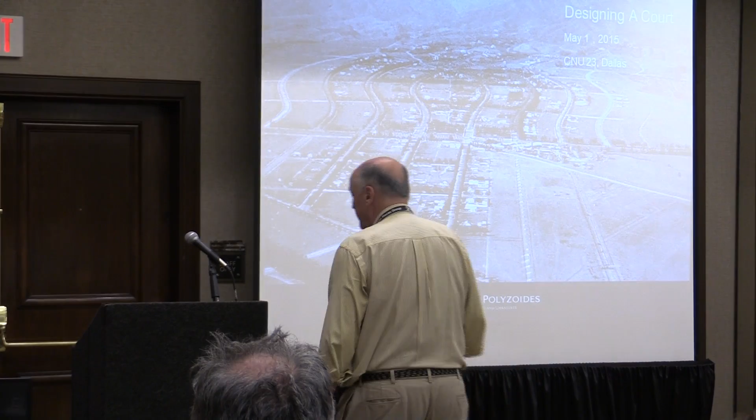One of the fundamental accomplishments of the New Urbanism is that it actually ended up turning the world of buildings and space upside down, because since the preeminence of CIAM urbanism and architecture took over the world in the 50s, 60s, buildings ended up floating in space, and space became a medium which was essentially residual. And that dissolved urbanism really as an identifiable placemaker, form giver, image maker in the world.

And it was the CNU who insisted that by reversing this figure-ground relationship, the void became really the most important aspect of both architecture and urbanism, in a sense returning to urbanism, having the void reconstitute this discipline and make it become prominent again after probably three generations in exile.

And the issue, as you will see in my first slides, can you turn some lights off? Yeah, actually, it's controlling lights. Are they back there? They're in the back again. Perhaps I can flip them up. If you can bring them down just a notch. I'm going to try to maybe stand someplace where I can see. Maybe in this corner. Am I blocking anybody? Probably not. How's that? Good. That's good.

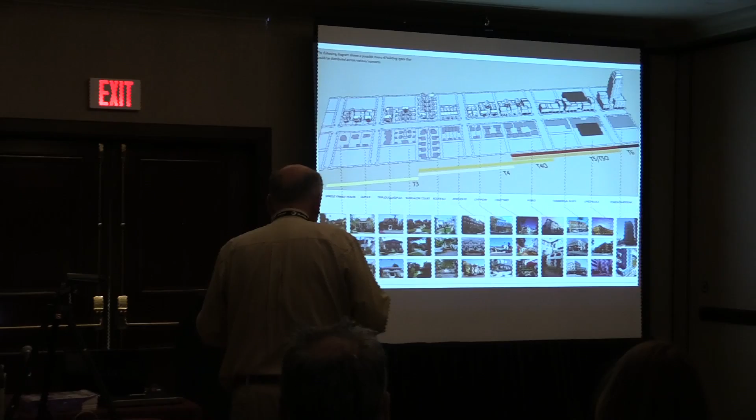So when we talk about courtyard housing, courts in effect, what we're talking about is a type that is operating within a spectrum of typology of intensity. It translates from single-family houses probably to towers along this drawing that you see at the top.

It is really characterized, organized by its emphasis on open space and public space, inside it and beyond it and around it, and it's operating at the very best in the robust T4 territory. This is very important for you to understand, because we're not talking about every kind of building of this kind and every kind of circumstance.

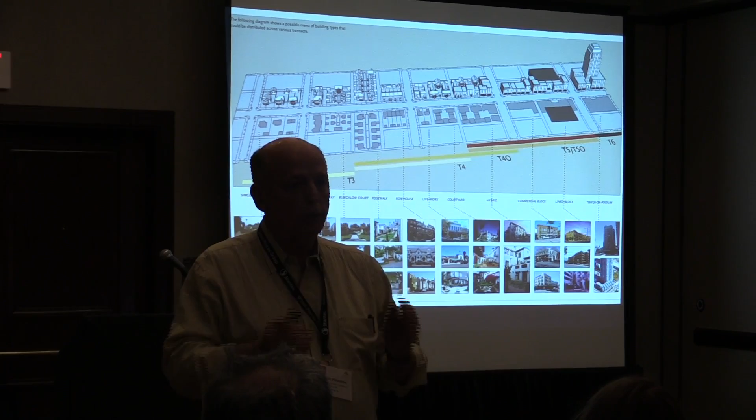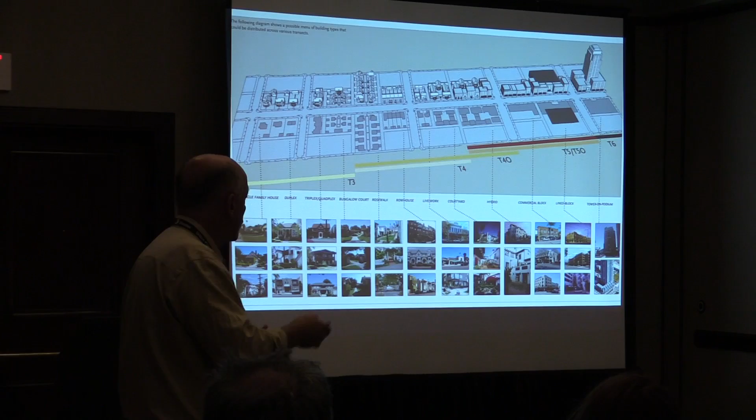We're talking about a particular slice, because there are various kinds of courtyard housing that are operating within T4, T5, which are denser hybrid, and which involve complications that I'm currently writing about in a book that I can't even get into. But the fact is that you need to think about this as being space-driven and operating within the middle range of housing, which is the rarest ones, and the missing ones referred to in this Congress.

And this is a typical fabric. This is sort of the habitat of this type. You have to think about this as sort of photographing gazelles in Africa. This is courtyard housing in Los Angeles, in a project in the city of Orange, in Orange County, I should say, and you can see that it is both operating within this transect intensity, but it is also beautifully compatible with other buildings within this intensity, because its built pieces and its voids

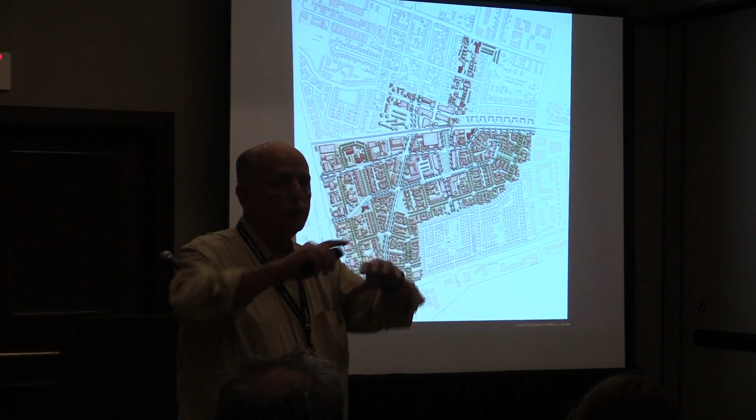are house compatible. And this is where the genius of T4 American town making is, that building types across a pretty serious range are all talking to each other and together form the city well. And this is an example of that. This is Seven Fountains, the first project we did of this kind 11 years ago, and it's sitting right there in the midst of buildings, some of them old, some of them new, spanning probably 100 years. And nonetheless, you can see how this building habitat allows that type to flourish.

And this is a 5-minute review of the book Courtyard Housing in Los Angeles, illustrated by recent buildings of ours, which we tried to build every one of. We're not totally successful. 12 dwellings per acre, bungalow court. Bungalow court, basically taking individual units, separating them, organizing them around shared space, parking in the back. Attached court, these buildings actually are connected side to side, shoulder to shoulder, parking underneath, behind it, on the sides.

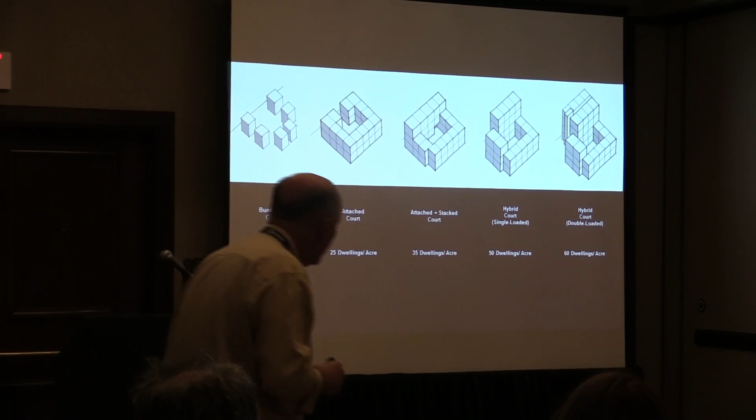We're talking about T4, and of course the two to the right are probably at the very edge of T4, but nonetheless, we have bungalow court at 12, attached court at 25, attached and stacked at 35, hybrid court at 50, and hybrid court double loaded at 60. And these involve 2 cars per unit. So these are remarkable density numbers, much higher actually with one car per unit. One could get a lot more density.

It's an amazing way to think that you have house compatible types that are operating at 40 DU per acre. I mean, it's just completely incredible, because 25 years ago, you would go into a city council meeting in some town in America, and they would hang you if you said you wanted to build 40 DUs per acre next to a house.

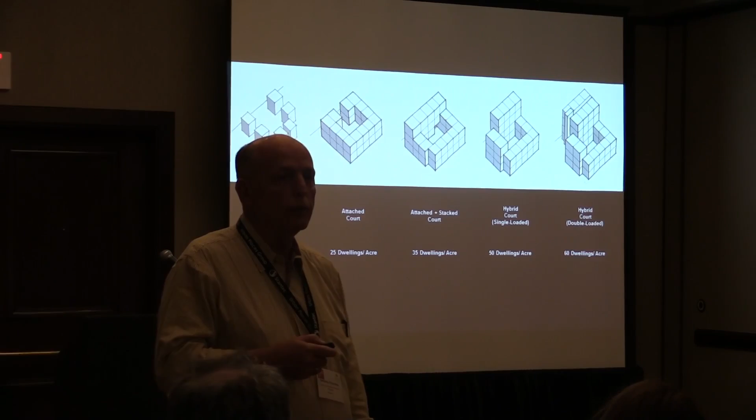And the other miraculous thing about this type, and this range of typology in the missing section of the transect, is that you can also walk, because all of these things are walk-ups, and I'll talk about this in a moment. You can actually have lofts of an unusual height, California lofts or industrial lofts, townhouses over flat lofts, townhouses over townhouses, flats over townhouses, and any combination of these types, so that you can derive the most extraordinary richness possible out of the dwelling environment in which we live.

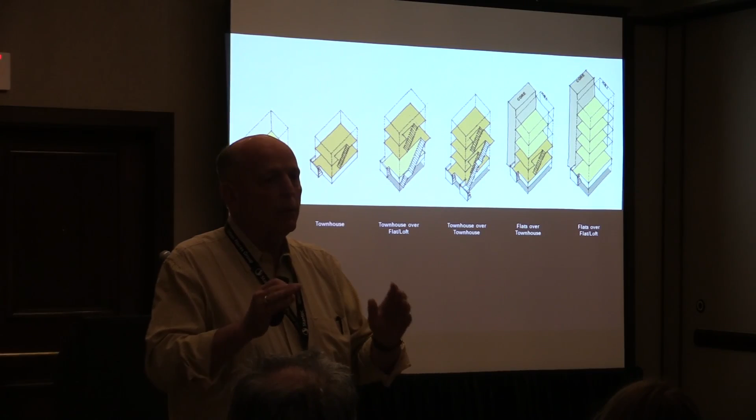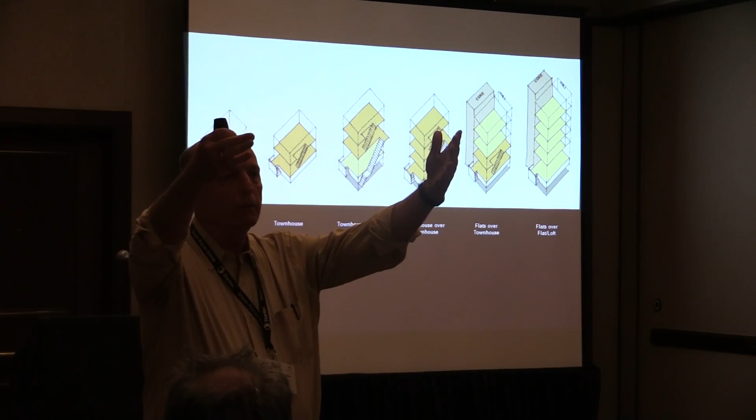And because this is a very foreshortened and painful introduction to the subject, this was so superficial, nonetheless, I want to remind you that the very essence of courtyard housing is that there are no elevators, lobbies, or corridors in this project. Basically, you enter the realm of a lot with a building on it. You either enter the units directly or up a stair into units. So you get flat over flat, flat over townhouse, or flat and townhouse.

I mean, that's exactly about it. I guess you can get townhouse over townhouse. These are the combinations you can have. Always direct access, always no common space. So you save about 15% of construction cost, and you have to spend it in the garden.

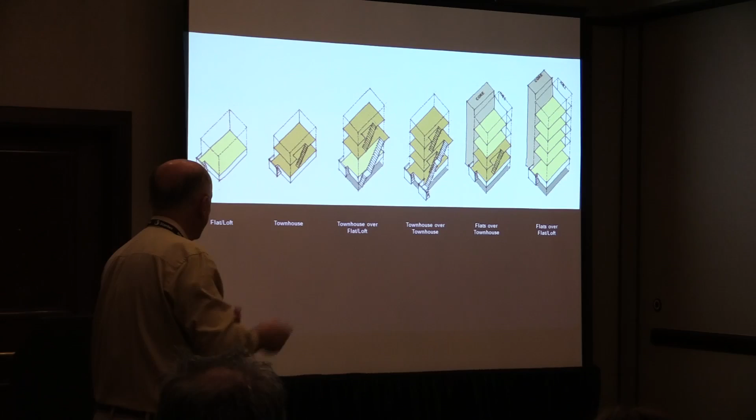And these are the types that we've managed to build in the last years. We built about 30 of these projects. Actually, we've designed about 30 and built about half of them in a very kind of hard-fought, quiet, but kind of resolute way of going about it.

This is our #1 project we did in our office in 1980. Pasadena Heritage asked us to move this court across town, and we picked up all these buildings and moved them about 3 miles and set them back on a new site and built a peripheral road and garages and backyards for them. The site they came from was about this big.

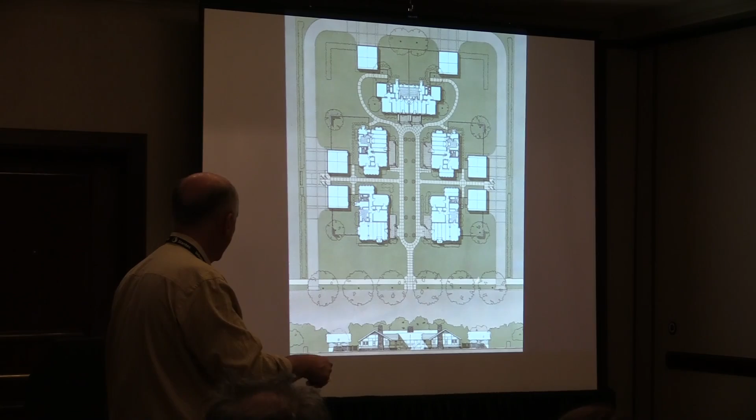So this is a wonderful example of rejuvenating and rebuilding a historic court and learning a lot about what that meant. It's particularly important that you can build a building like that in a residential neighborhood with single-family houses, either 3, 4, 5 units per acre, and all of a sudden you get 4 times the density here, and the thing is miraculously consistent with the world and respectful of the world around it.

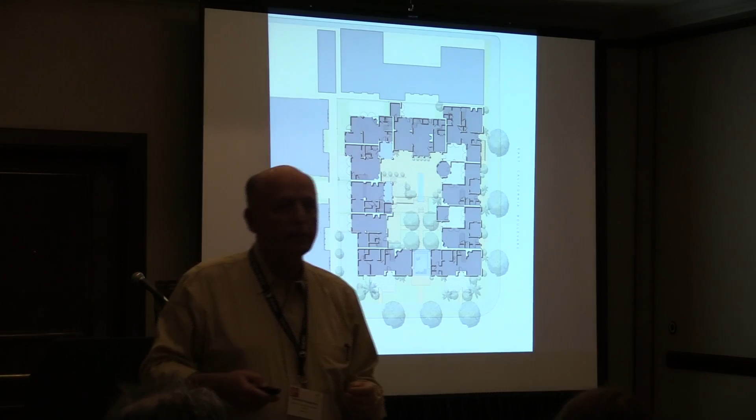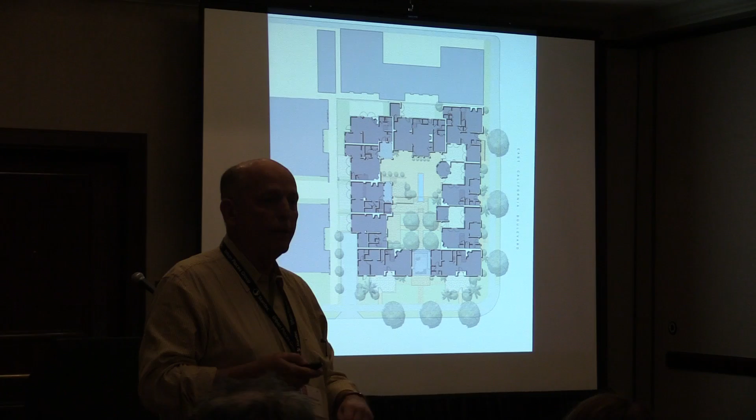And then, the book was written in '77. We begged on our knees for at least 10 to 12 years for somebody to actually build one of those for us. And in the end, nobody would. So we bought that lot behind our office and built the first one since about 1937. And actually, we made about $53,000, which was really, at that point in our lives, an amazing amount of money. So basically, what we learned from the book, we applied.

You can see paired units. First of all, when you're dealing with units that are fee simple, you don't have to repeat anything, and you don't have to stack anything. The repetition is only a matter of architectural interest. And so what we in fact did is we paired these, we made this the same, and we put live-work units here, so you could enter both from the side and from the street.

It's a corner arrangement. There's a special unit in the corner with a live-work unit there, special unit here, special unit here, special unit here, special unit here. The result is that there are 10 units, of which about 6 are different and 4 approximately the same.

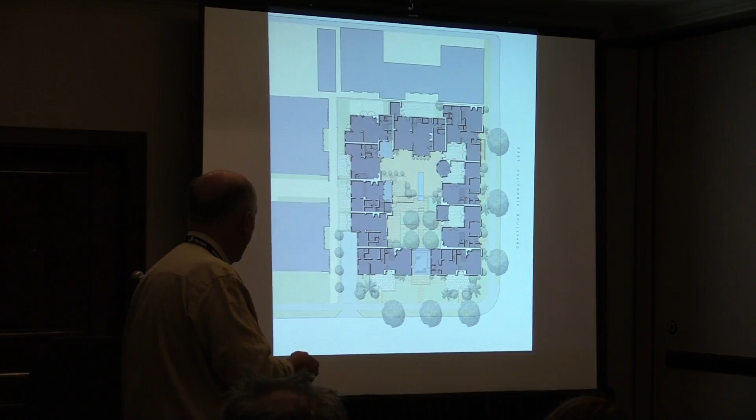And this building began the extraordinary inflation of per square foot prices for condominiums in Pasadena. When we started this process 11 years ago, condos were selling in the $350 to $400 territory at the upper edge, and they're currently selling in the $650 to $750 because of this work. Not this one in particular, but in this kind of vector.

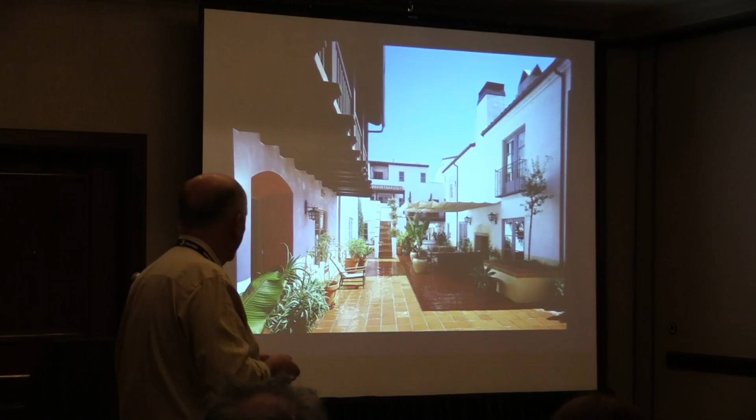This is a soft garden, and then this is a garden that shows both the hard-soft differentiation, but also shows the house compatibility. It's about 35 DUs per acre because there is a work room within each unit by West Hollywood zoning. So there are 20 units and 20 rooms.

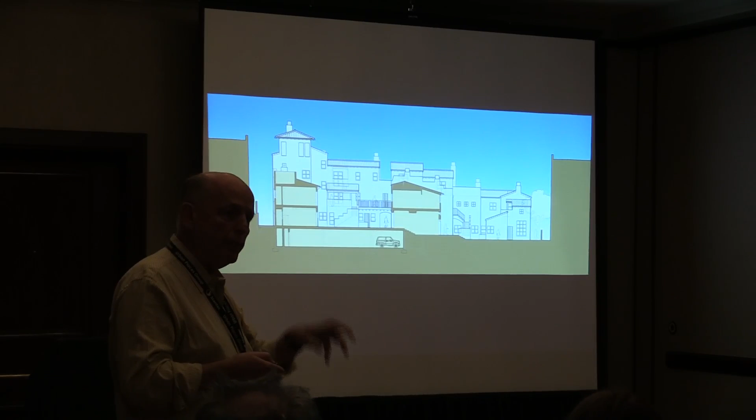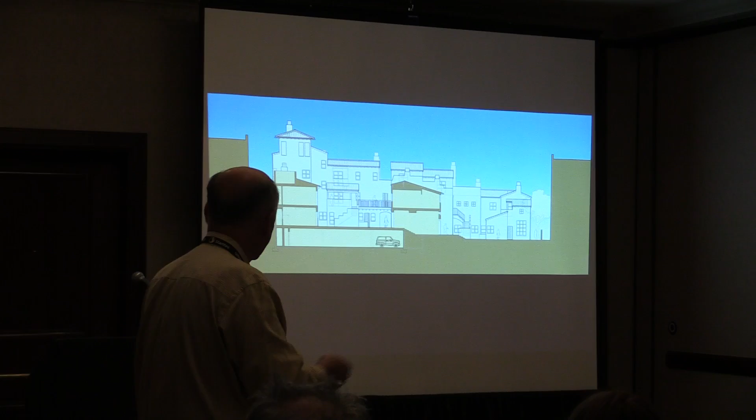You can have a business in your own house with a separate entrance, which gave us an enormous opportunity to do crazy things like build all the stairs going up from everywhere to everywhere, just to differentiate the workroom from the regular room. So this was an unusual learning opportunity, and then this is an example of the much closer to 50 DUs per acre, which is double loaded here.

You can see the elevator there, I'm sorry, there in the lobby. And you come up, you have to connect from here to here, that's it, and all of this is stacked 4 stories. Townhouse below, 2 flats above. And these are 2 and 3 stories everywhere. 2 stories here to allow the southern sun to enter. 2 and 3, all walk up. Stairs here, stairs there, stairs here, and so on.

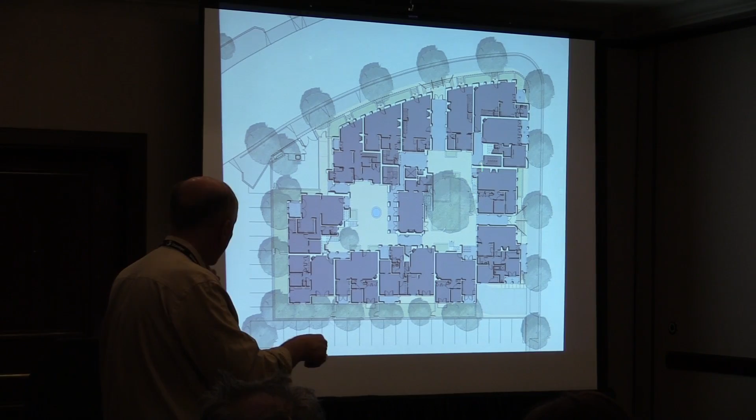And this is what the building looks like on the outside. And this is what the interior is. The first courtyard with the townhouses and the corridor. It's a loggia and a balcony on the second level. And this one is the second courtyard. This is selling in the $650 square foot territory. It's a very, very popular place. It's impossible to buy in there because people move and buy and stay.

And this is from the point of view of urbanism an important thing to see, because what this architecture, compatible with a single house, does is it can be played down within a block to extraordinary degrees and advantages in moderating the densest forms of this courtyard housing with smaller forms.

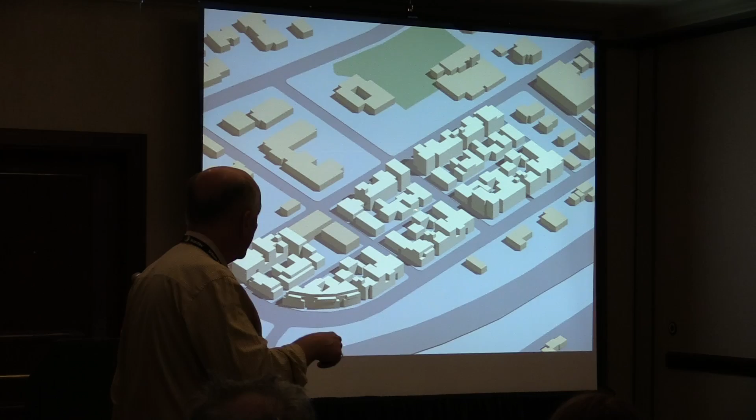For instance, this is a competition drawing, and you can see in a single block there are 2 boulevards on either side. There is a piece here in the edge which is double loaded, purely double loaded, and becomes courtyard housing single loaded behind. And in the alley parts, which are the short parts, there are some very, very much smaller buildings, house scale buildings.

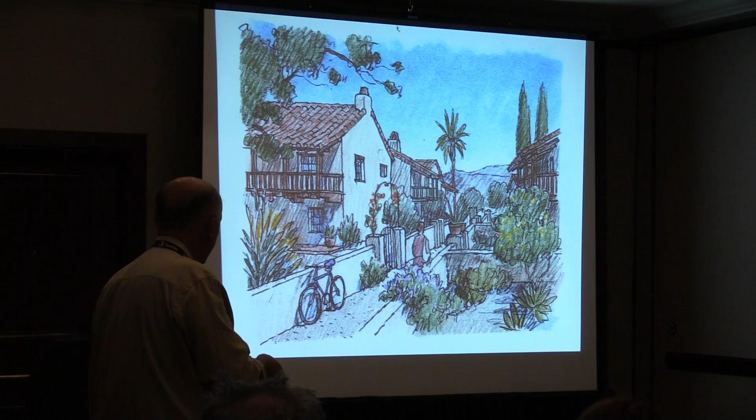So what you end up is a view like a version of this on the boulevard, which is robust, as you can see, with significant differentiations always on the fourth level. That's a very strong way of differentiating these buildings, cutting it back, eating the corner away, inset balcony, projecting balcony, retail at the bottom. And then the side street is a series of row houses, and the alley is a series of houses. So that within a single block is really a remarkable way of differentiating and compacting this kind of architecture within a walkable mixed-use urbanism.

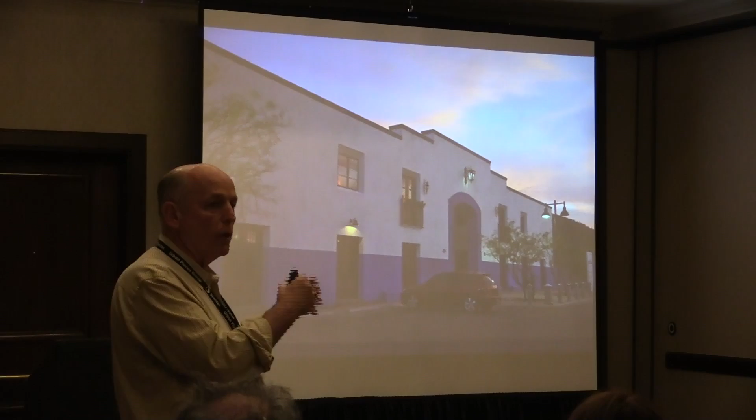And there are also some very unusual outlier examples. We're working on a project at Rio Nuevo, which was one of the projects we designed in Arizona, which is well worth visiting and under construction. There's some very interesting things going on there. And this was supposed to be a street that was going through to the edge of the site, and a developer builder decided to use the street, bought all the lots, about 6 lots on either side, and put a gate on one side and a gate on the other, which is open during the day and closed at night, and decided to take the street that was projected like this through this place.

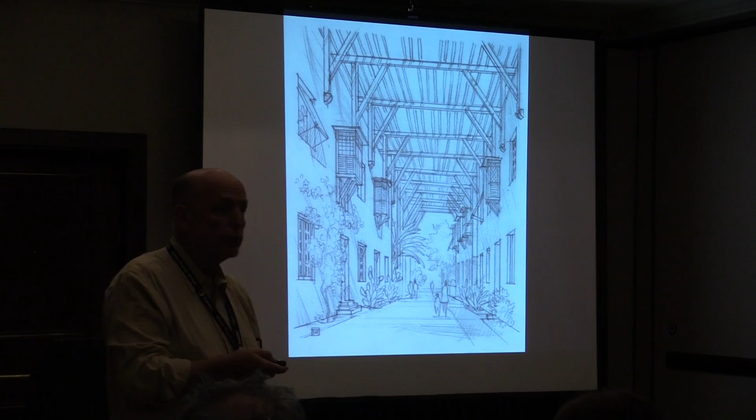And he's actually setting buildings back, sometimes very dramatically. And he's actually made courtyard housing out of it by sharing the public space and controlling it during the night and keeping it flexed, shared or public. It's really extraordinary. What is the name of that? Rio Nuevo is the name of the project in Arizona. It's in Tucson.

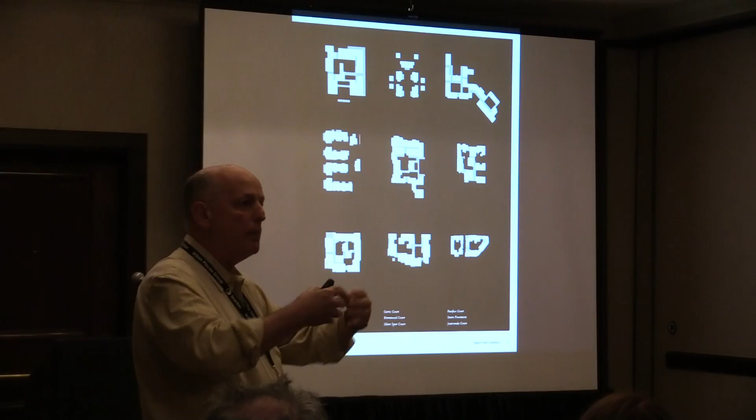All of these are really most amazing ways of showing how one simple idea about a kind of building can actually render truly miraculous results, all of which speak not to anything else, but the fact that this very flexible fabric can then make interesting city both at the solid level and at the void. So I thought it would be very, very useful for you to see how one makes.

First of all, we're going to have an exercise in which we're going to try to make a building like this in half an hour, whatever it takes, 20 minutes. But it'd be useful for you. I think there are two pieces of information I want to disclose to you before you do this. And I was very lucky because James showed me yesterday the presentation they had done on the making of a neighborhood. So I've decided to follow their lead and do it exactly the same way.

I'm going to show you, first of all, a project of ours. And we're very lucky because I have a project the way we showed it to a design review commission. So it's actually an intact presentation. So you can see how this thing is cast, as an idea. And the second part that I'm going to show you is what are the 10 principles that one can utilize to design this kind of work. And then we'll turn the lights off and start drawing.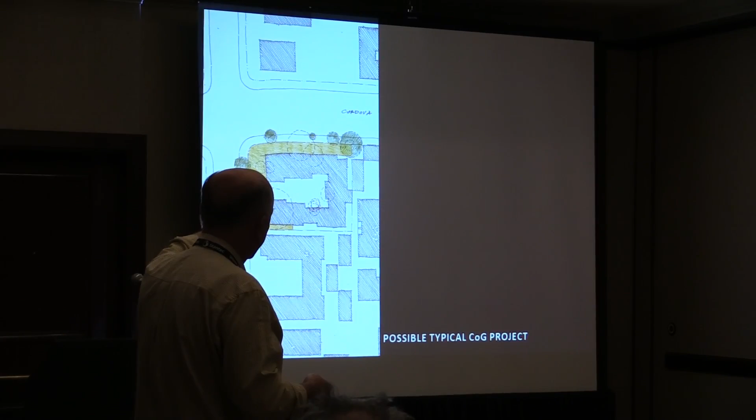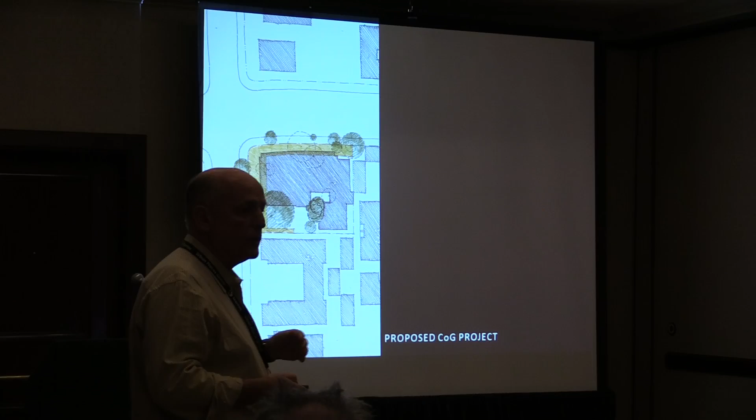And this is the possible typical City of Gardens project, which is a project that would be garden in the middle with two arms, because that's the normative type. But amazingly, Alexander, Wall and Solomon have no corner instructions for this type. Aha! So this is the project we attempted to make, and you'll see why we tried to do this. So we're pulling the garden to the side in part to save the building next to us, so we turn our face to it as opposed to our back.

And there are some other extraordinary opportunities that you will see also that come out of that thickness in the body of the building. So the second step, after choosing a type and working with it, is defining an architectural character in context by choice of massing, frontages, and both building and garden design ingredients appropriate to this place in the city.

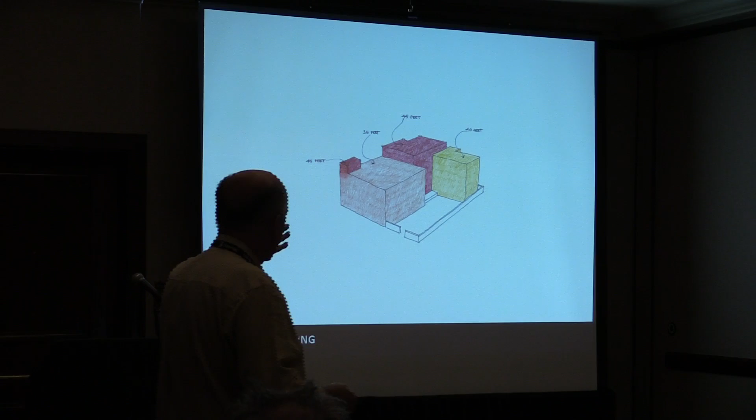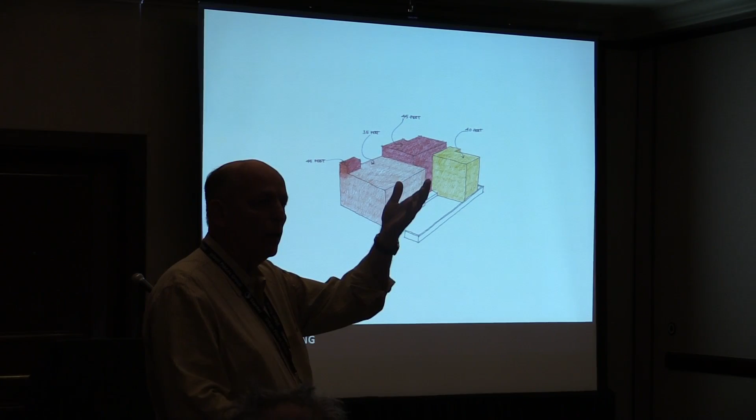We have a beautiful tool in the Pasadena zoning code, which is height averaging. So it is possible to take the maximum height and take half your building above it and half below it. So it allows us to actually break up massing. So we went from 40 average to 45 and 35 in 3 parts.

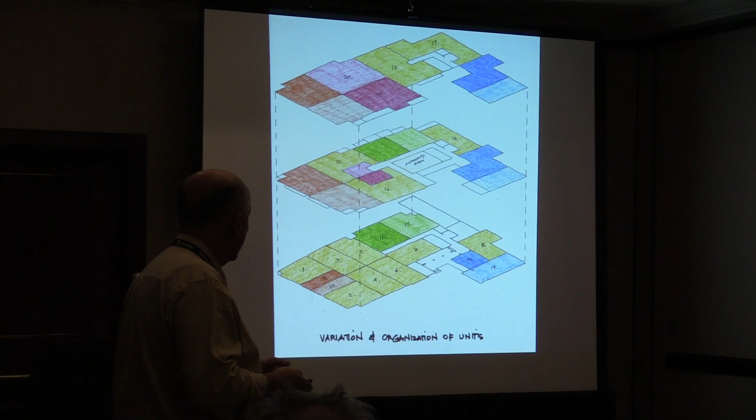And then we're able, within that structure, you're probably going to get, it looks like a Rubik's Cube, and it is. There are some flats, some townhouses, lots of overlap, extremely unique and unusual internal conditions of design of the units, which have to do with the fact that this client had half of the program be under 600 feet and half of the program be over 1,500.

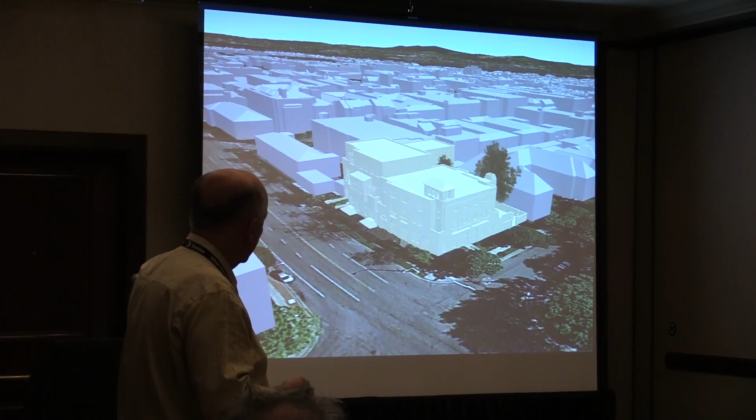And then we understand character to be the taking of all these things and building them together into a nascent image that is definitively of a kind, but does not have the architectural expression that comes out of a single hand. So this is the building in place. You can see on the left-hand side the stairs taking to townhouses. There's a projecting balcony there, a corner tower, the courtyard on the side, and that's the way in which the building sits in that corner.

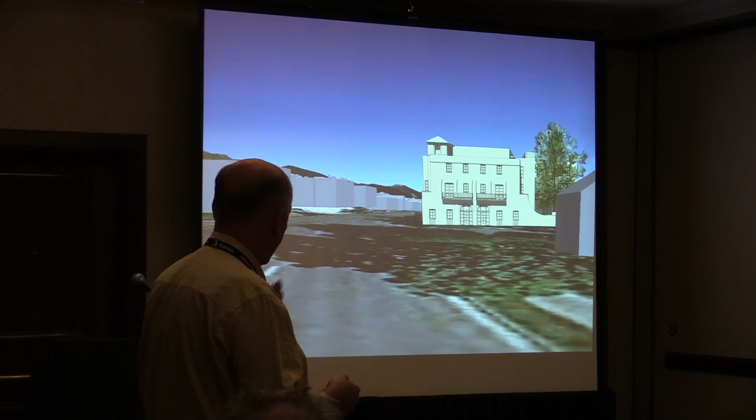And one of the reasons for making it symmetrical and central is that the boulevard, as you remember, just shifts around. So as you're coming through it, you're looking at this building dead on, and then you skirt around it. And the third step is that the architectural style proposed is integration of type and character issues into an expression that's unique and contemporary. It's something that comes out of the heart of whoever has the privilege to draw the final thing in all this detail.

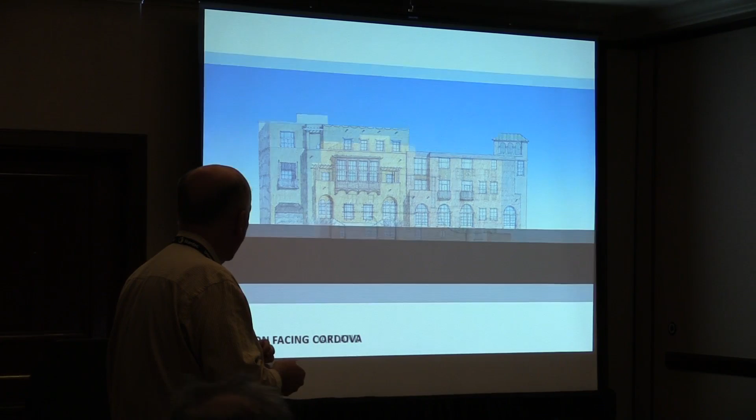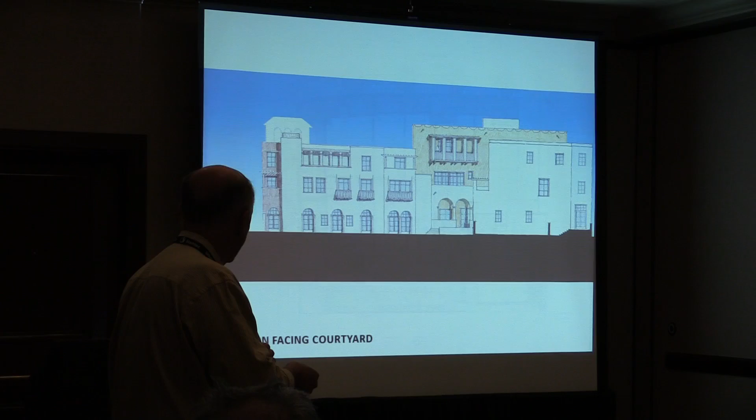And you can see how the building is now growing a face. It's growing an expression. It's growing materials. It's growing a texture along with a more precise proportioning and scaling of its elements. And here it is. Excuse me, we're going the wrong way. The outer face of the boulevard is actually broken down into various building scale elements. The symmetrical front is really a singular expression of the building as one approaches by car, and then the internal version is even more broken down into various pieces.

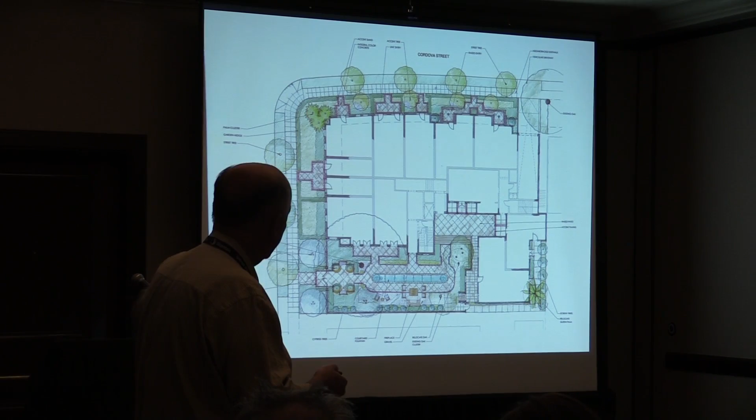And then a proposal about the garden. The garden is a very important part of the building. It is secured. It has water in it. It has a barbecue fireplace. It allows people to cross and come through. And there are all kinds of private garden entrances to the ground floor of the building. You can see sketches. This is all design commission stuff. You've been through it 1,000 times, I know.

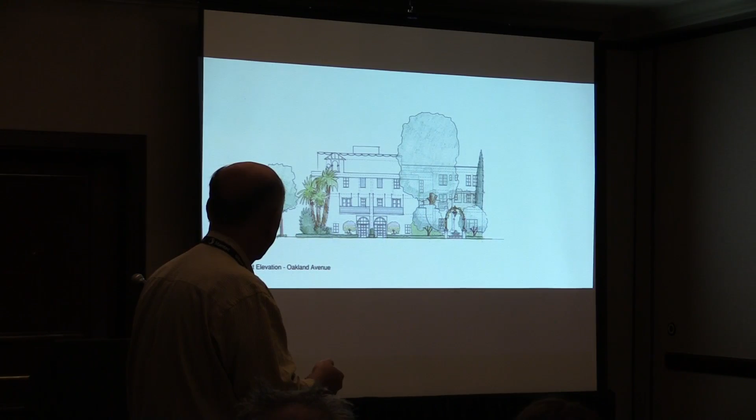And this is really the building, the way it emerges from this process. It is still not styled yet, although after this layer of consideration, it is actually getting damn close, right? And this is what it looks like with a commitment to a singular way of being built.

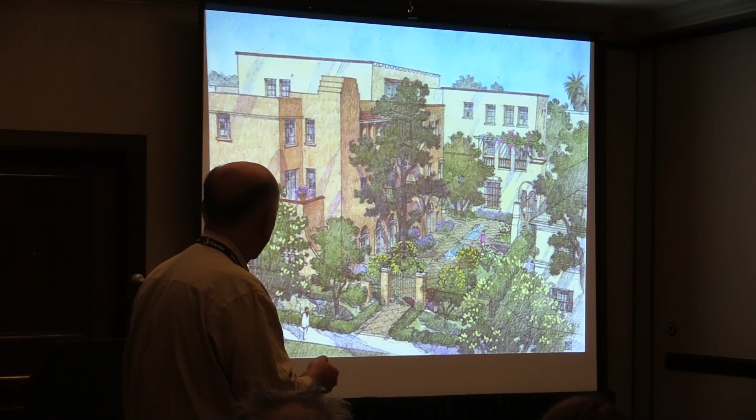We're going to look at these 10 issues, and I'm sorry I didn't have this illustrated. I sat last night in my room and after a couple of beers, just scribbled. Yes, Laura. Scribbled some serious explanations of what these things look like and why.

So I'm going to give you the 10 characteristics. They might be in a slightly different order because I didn't remember them very well.

All right. That's great. Should I do this one? Can you get closer? Yeah, you just kind of aim it in there. There, you want to see this? Just slide it down here and there you go. Include the camera. Actually, I think we should do it so we can read it, right? Facing it might be a good idea. Can we get any closer? See if I can bring it down by hand. Okay, so, not to waste time.

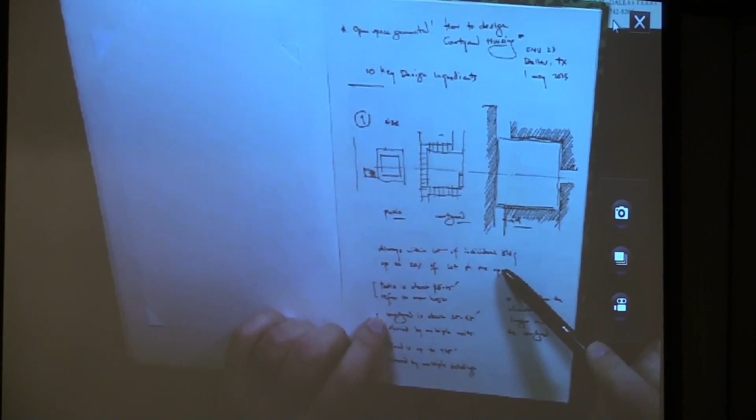Key ingredient, size. We have a patio, a courtyard, and a quad. And always within the lot of an individual building, 20% of the lot size has to be in open space. The smaller the lot, that is one space, but when the lot gets enlarged, it becomes a possibility of multiple spaces, including maybe quads, courtyards, and patios, depending on the circumstances, okay?

A patio is about 15 to 25 feet, and it refers typically to being controlled by one house. A courtyard is about 35 to 45 feet, and is shared by multiple units. And a quad is up to 125 feet, shared by multiple buildings. One house, multiple units, multiple buildings.

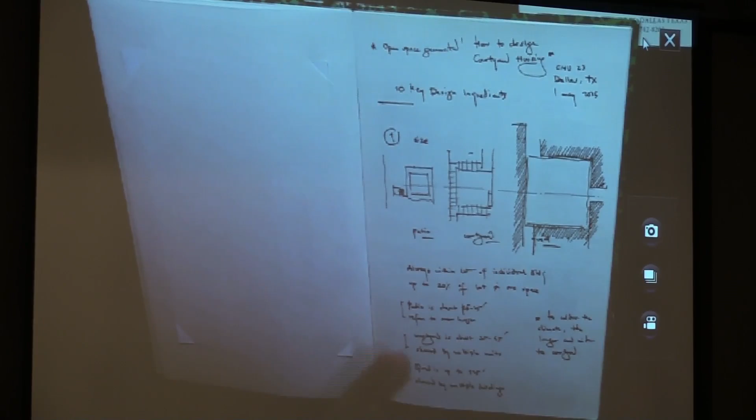And in colder climates, because somebody asked me about Toronto, the longer and the colder the climate, the larger and wider the courtyard. Because when you're in a hot climate, you really want to keep the sun out, and when we're in a cold climate, you want to pull the buildings out and allow, particularly in the winter, for the sun to melt the snow. So patio about 25 feet, courtyard housing 40, 45 feet, quad bigger.

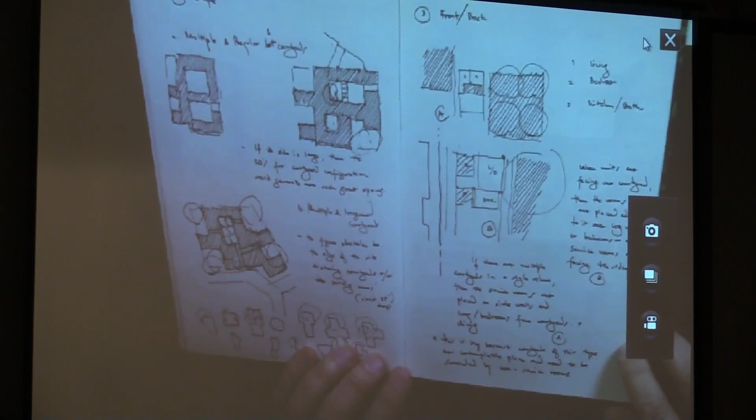The second issue, can we see it? It's a little bit difficult to see. Maybe you can bring it a bit further, can you move it sideways? Just in case? That's much better. There we go. Yeah, that's perfect. Go on, please. That's better. So, right. There we go. That's much better, isn't it? So I can just turn pages, huh?

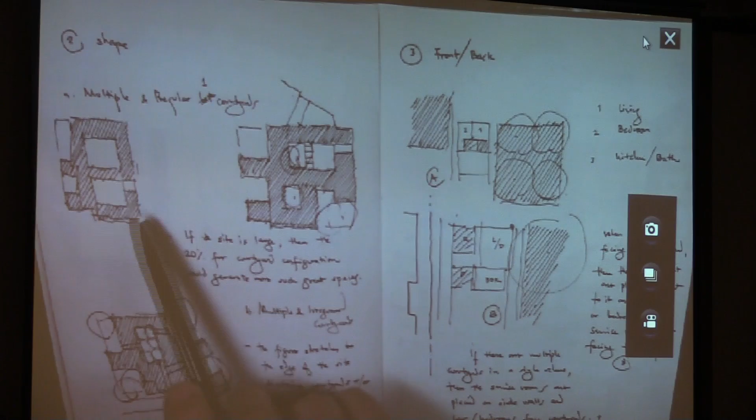Okay, on the left, shapes. You can see on the left multiple regular courtyards. If the site is large, then the 20% for courtyard configuration, we generate more such spaces. And then on the bottom, multiple irregular courtyards. The figure stretches to the edge of the site, distorting courtyards or distorting the buildings. The buildings are about 35 feet, take it from me for now. It could be 36 or 33, but 35 for today. And on the bottom right, any absurd array of courtyard shapes that warms your heart.

And then on the right hand side, front and back issues. Basically, if the courtyard is here, and a unit is here, and a courtyard is there, you can actually put living rooms, bedrooms on both of them, and kitchens, bathrooms in the middle. If you only have backyards here and another building here, and here you have just another courtyard, then you have to put bedrooms and living rooms that way. So facing the courtyards, you want as much regular room, living space as possible with services out of sight, side by side in buildings or on the service side.

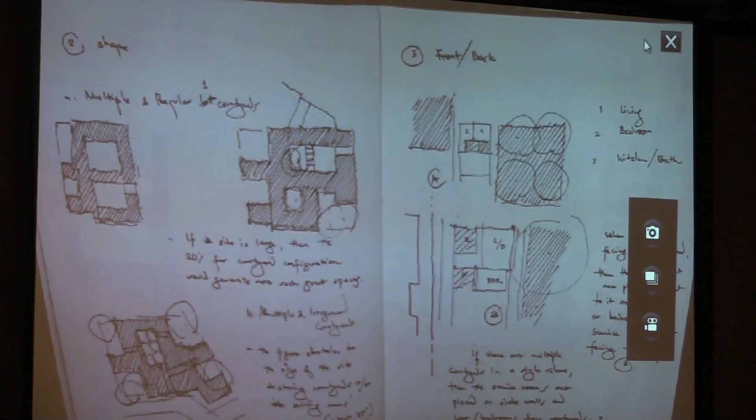If you want me to, at some point, I can make some images of this and send them to you over the internet, because there are some interesting notes in here. When units are facing out, if there are multiple courtyards in a single scheme, service rooms are placed on the side walls, etc. This is key because courtyards of this type are contemplative spaces and need to be surrounded by non-service rooms, okay?

Number 4 is our sections. Section is about how light comes into a place like this. When a courtyard is 40 feet, then it can be 30 on one side and 20 on the other, or 35, 30, and 20. You can see that dropping one side is always advantageous because it allows for the sun to penetrate. What you don't want to do with this kind of project is to do this, because we have a word for it, and it's called a light well.

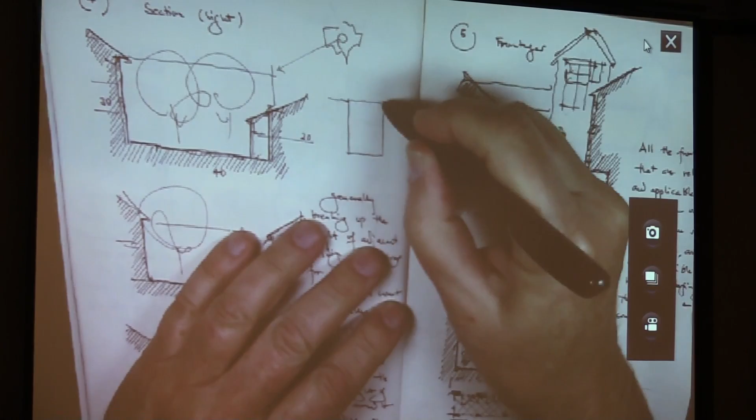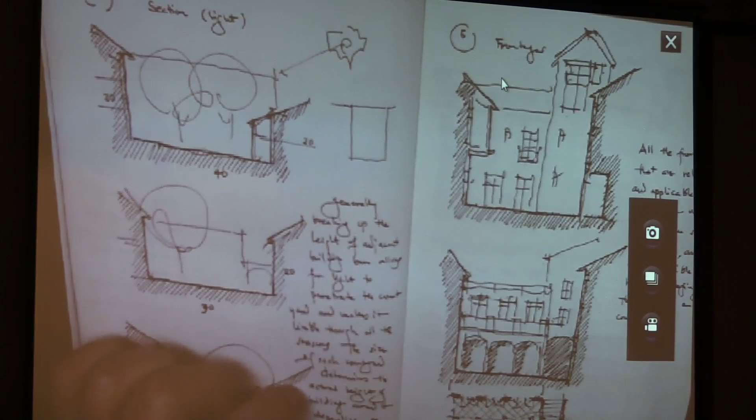And generally, breaking up the height of adjacent buildings allows for light to penetrate and makes it livable through all the seasons. The size of each courtyard determines the actual height of buildings around it, depending on orientation. Here you can see a 2 and 2 story, a 3 and 2, and a 4 and 3. And in all cases, trees are outlined in ways that they actually frame the space. I think that's clear, right?

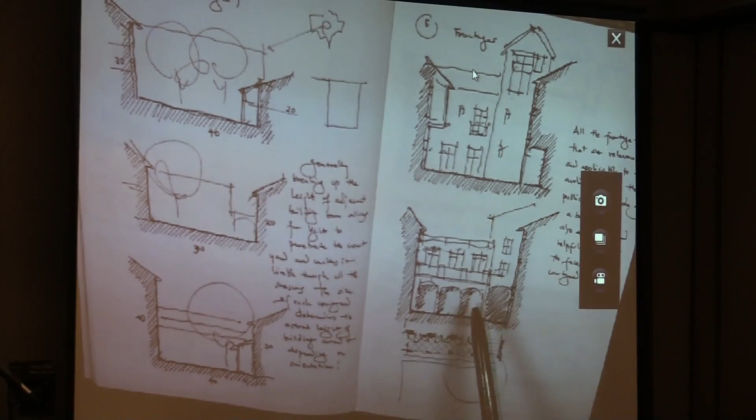And then all the frontage types that are relevant and applicable to architecture on the public realm side of the building are also available and helpful for defining the faces of a courtyard. Here you have a hanging balcony and a tower, and here you have basically an arcade with a balcony above it. And there are, of course, countless other examples. And at the bottom, both of them are actually facing a courtyard.

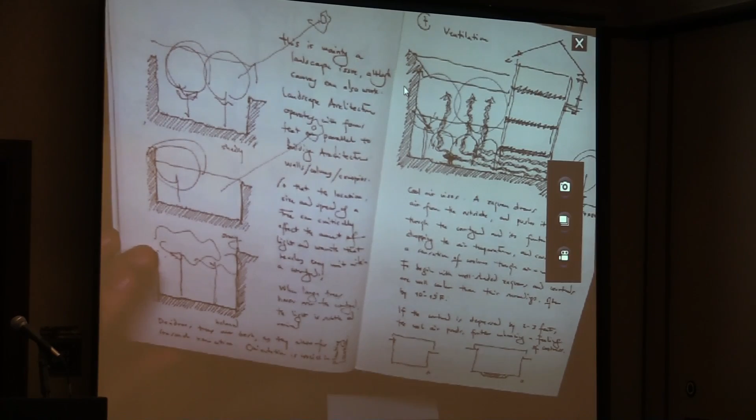Canopy has to do with shade. This is mainly a landscape issue, although canvas can also work. Landscape architecture operates with forms that are parallel to building architecture: walls, columns, canopies. So the location, size, and spread of a tree can critically affect the amount of light and warmth that reaches every unit within a courtyard.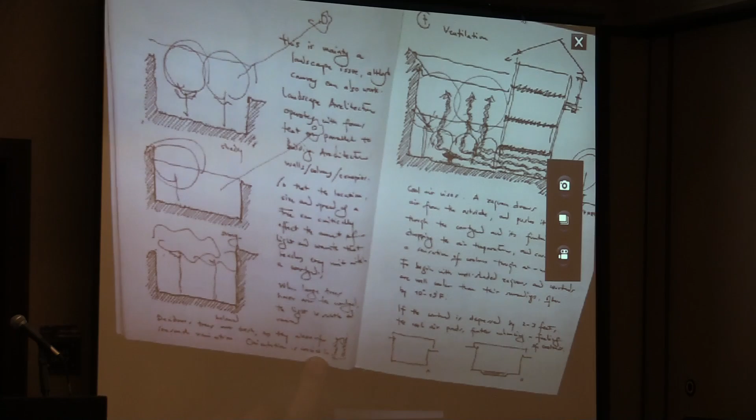When large trees hover over a courtyard, the light is subtle and varied. In the last case, this is shady, this is sunny, and this is balanced. Deciduous trees are best as they allow for seasonal variation. Orientation is crucial in determining planting locations. Seventh item is ventilation.

Cool air rises. The zaguan, which is the traditional Hispanic form of connecting courtyard and street, draws air from the outside because of the rising of the cool air in the courtyard, and pushes through the courtyard and its fountains, dropping the air temperature and causing a sensation of coolness through air movement.

To begin with, well-shaded zaguans and courtyards are well cooler than their surroundings, often by 10 or 15 degrees. If the courtyard is depressed by 2 or 3 feet in hot climates, the cool air ponds, further enhancing the feeling of coolness. And this is a very classic Arizona trick.

The two other issues are the issues of access, and they're very important: in colder and particularly rainier climates, a path of circulation from the street to the unit under cover, including stairs, is particularly desirable. In such cases, the width of courtyards needs to be enhanced. And you can see here, if you enter at this point, there's a porch. You can peel to the right to reach these units.

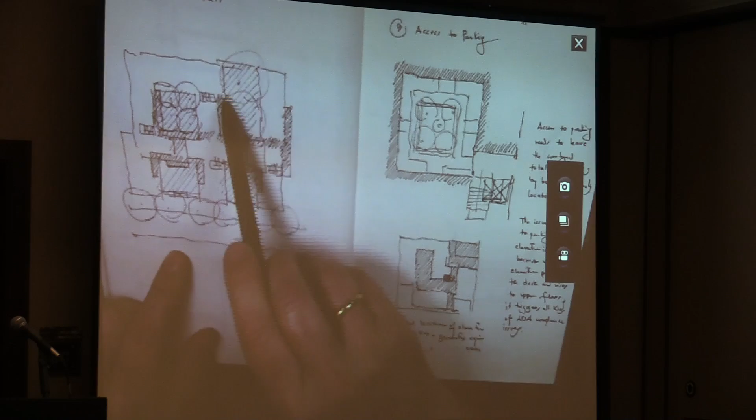You can come to the courtyard, there's probably some kind of arcade in here, reaching stairs. You come through this point and this point to feed the back, and you have stairs there, and so on. You can see it's a network that you build that allows complete access.

And on the right-hand side, access to parking is very essential, because you both want to be centralized in the way you access parking, and you want the parking access, when you're not central, whenever you have it, to be off the courtyard. Courtyards are not particularly... they have a lot of attitude, courtyards, they're very sensitive. So you cannot stick things into them. They have to be whole by themselves.

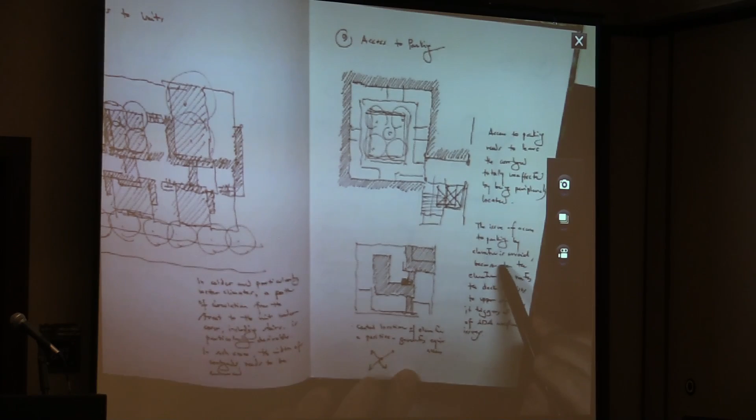And access to parking needs to leave the courtyard unaffected, but also the issue of access to parking by elevator is crucial, because when the elevator penetrates the deck and rises to upper floors, it triggers all kinds of ADA compliance issues that can raise havoc in a project. So as long as the elevator comes to the deck, you don't have those issues. And all units are walk-ups.

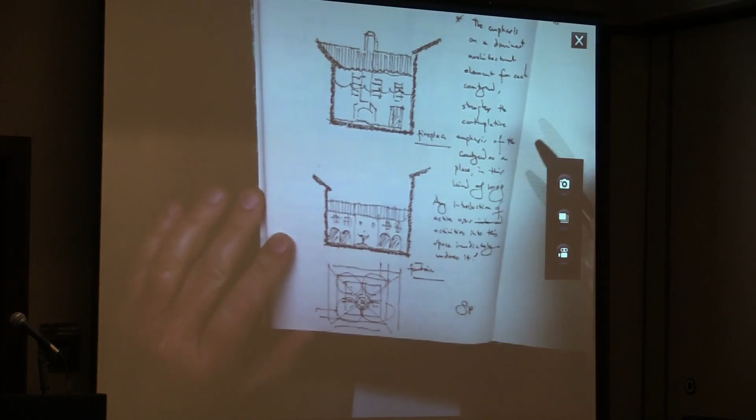And the final issue is focus. The emphasis on a dominant architectural element for each courtyard strengthens the contemplative emphasis of the courtyard as a place in this kind of housing, and an introduction of active uses and activities in the space immediately undoes it. And you can see one of the classic examples in California courtyard housing, a fireplace in a courtyard, and then also a major fountain in a lesser courtyard with a planter below.

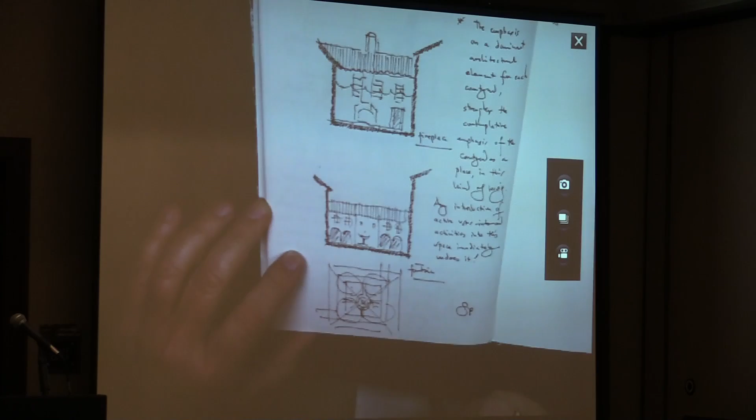So I hope this very fast explanation gives you some very clear idea and some inspiration about how to make this kind of project. And I will give you the following very simple instruction. And maybe James and I both can go around and...

Sure. How much time do we have? We're just about a half hour left. Okay, so that's almost perfect.

So what we'll do is this: we'll take a piece of land that is, let's say, 2 by 3. Let's say it's 120 by 180. We'll assume that we don't have to worry very much about the street. But let's say we assume it's a 30-foot street right away, and that the street is right here, and that there is maybe a

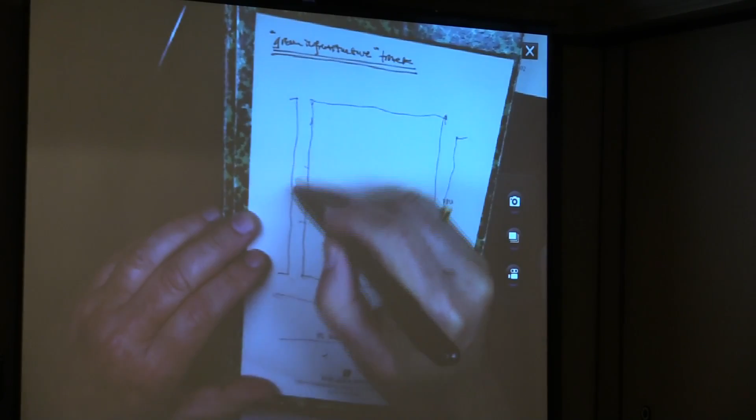30-foot street with 15-foot setback on our side, and that on this side we have a neighbor with a 10-foot setback, which is a very brutal one, and on this side we have a neighbor with a 10-foot setback with a little bit of a cut in the back. So this is 10 feet, and this is 20 feet. And in the back we have a neighbor that gives us a 20-foot setback. So our site is right here. So this is how I would like you to start thinking about it. And I'll give you only a few hints, and then you can go full speed against the wall.

Multiply 120 by 180. Multiply 120 by 180 and get 20% of that for open space. That's the minimum open space you have to have.

The buildings are 35 feet wide, and what I would like to do is I would like to make the figure of a building of this kind without thinking too much about what you heard, and then take one courtyard under the 10 points and try to design it, as big as you can on your sheet. So there are 2 drawings necessary: a small sketch of a figure, and then another drawing is just a drawing of a courtyard within your figure. Okay?

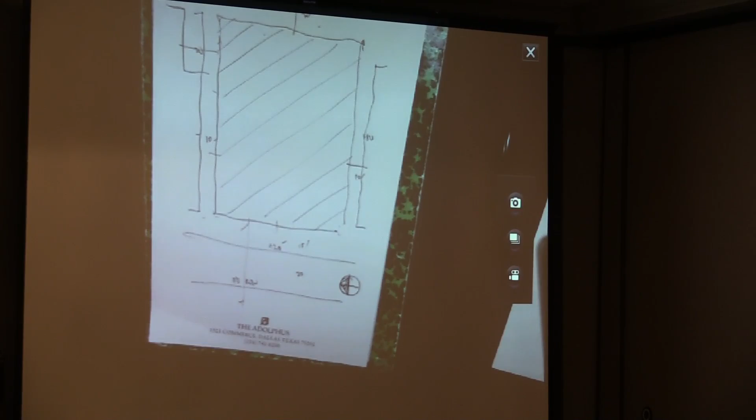So the only reason for you to have frontages inside this courtyard is when you go to 3 stories, because at 3 stories you have to basically get to the second story by stair, and the stair can be either exposed or it can be inside an arcade. It can be all kinds of things. Anyway, this is it, and I'll repeat.

This is 120 feet front. The street is 60 feet wide, 15-foot setback, 10-foot setbacks here, 20 in the back, and north is this direction. 120 feet by 180. So if you multiplied 120 times 160 and took 20%... 120 by 180. Sorry, that was a tricky thing.

Multiply by 20%, and then decide the shape and character of your courtyard, and design this building from the void to the solid. Basically the units within are going to be designed like salami. We're going to cut them at the end as we need to. But what you're doing is you're making a void, you're interconnecting the voids, you're locating stairs in the voids, and then you get to second levels and you go from there.

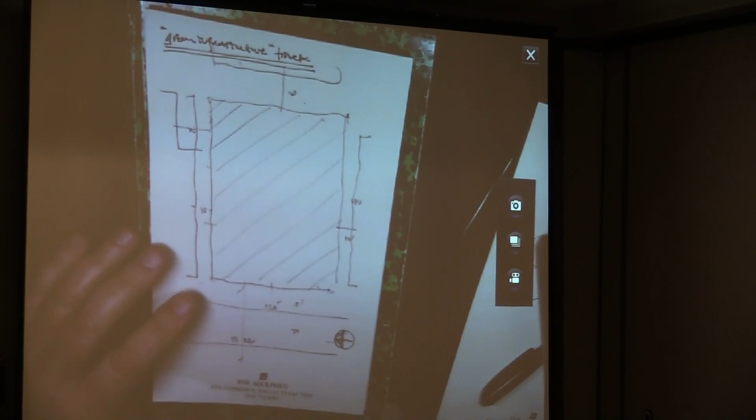But for now, just the voids. And then enlarge one of those voids and let's work on it, okay? That's great. Any questions? It's pretty simple, actually.

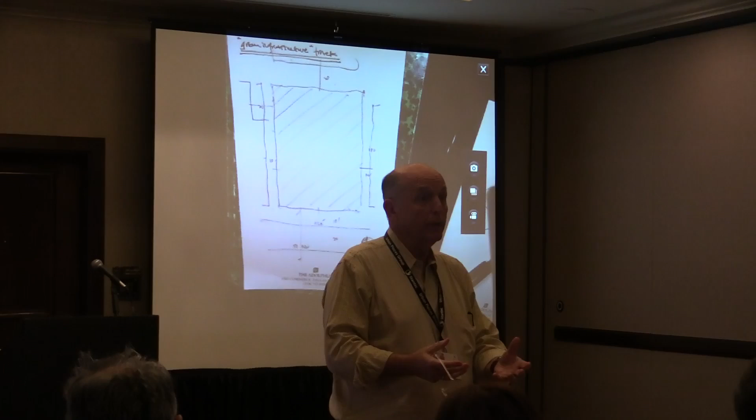Parking is underground, so someplace there needs to be an elevator that takes you all the way through to the basement. Now, why is parking underground? Because when you're dealing with 40 and 50 units per acre, the cost of land is so high in those kinds of places that you cannot really use land for parking. So you're buying the land underneath the building as extra land almost to accommodate the parking and build density on top of it.

Do we need to put the lights on? Yeah, okay. Okay, we'll let you work for a few minutes. So if there are any questions, just raise your hand and we'll just come to you. And actually, this is open book, so we could share questions.

Oh, I like this. I'm beginning to think about quitting work. Too much brain.

Units assume 35 by 35? Yeah, the depth, yeah, 35. 35 square would give you 1200.

How does everybody feel in terms of your pens and pencils? I've got some mechanical pencils if you want to draw more lightly, and I've got a few markers if someone needs something thicker. Is everybody comfortable? Mechanical pencil? Okay. I think you're going to need at least a couple of different kinds of instruments. Maybe a light pencil to draw with first, or a light pen even, and then some thicker pen to give outline to the building against the courtyard. And then you need a thin pen also to draw inside the courtyard. And maybe some color.

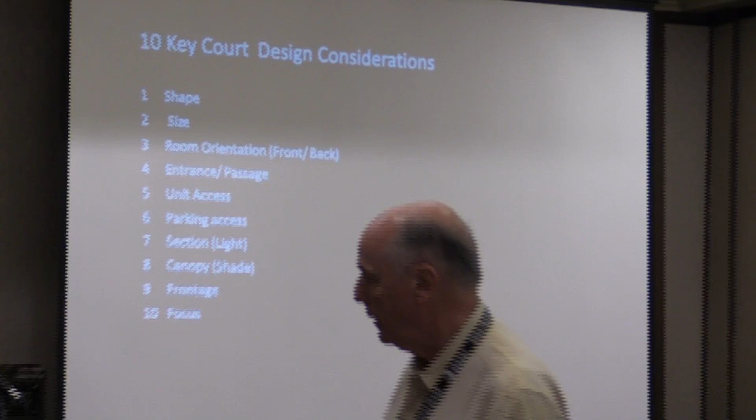Are all the units dual lit from two sides of the building? That's the whole point. Yes, either directly or indirectly, meaning that sometimes you might be a little bit behind a corridor, very rarely, but you would still have some windows and so on. But by and large, the idea is that you come up at the corners of the courtyards or in the middle between the units, and then you rise and you have every unit looking back and forth. And that's a tremendous advantage. That's where the house comes from, right?

Should move this over here, we can clear this table off. I actually thought I had something in the presentation that I don't have, which I regret. I must have lost it in the translation. I would very strongly suggest that you look at books from the 20s and the 30s. I have in my library a lot of books from particularly Southern architecture, Italian and Spanish, that have a lot of documentation drawings of classical and particularly traditional architecture, where architects have this fantastic capacity on one sheet to draw site plans, sections, elevations, garden details, door details, handles. It's just completely, absolutely fantastic.

And what is extraordinary about this is that ultimately you have to think about the most extreme case of an urbanist conscious architecture as being one that can be consistent from the region to the door handle in some good way. And learning how to operate within that continuum is not very easy. And those guys were masters.

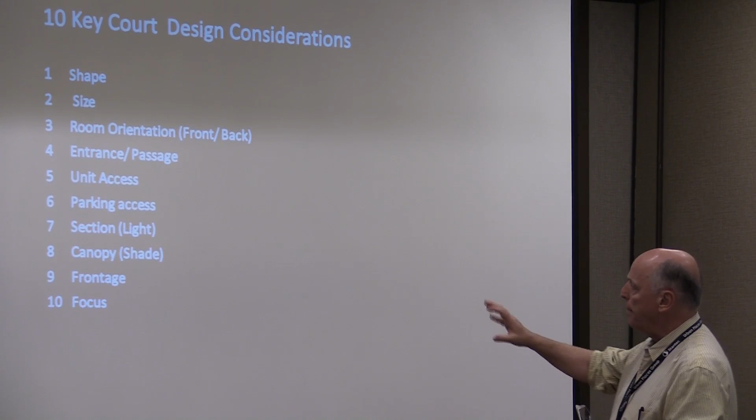Where is the zaguán? How are the courtyards interconnected? I think that is this question. Unit access, I wouldn't worry about very much. Parking access would be nice to show where the ideal location for that would be. I think a section would be good, and then frontage, focus, and canopy, basically 8, 9, and 10.

8, 9, and 10 is what this drawing is about, essentially. How you make a canopy, how do you work with frontages, perhaps on 4 sides, and what do you put in the middle? And if you're working just in plan, it'll be fine too with a few notations. If you just go to plan only, that's good. They don't have to be symmetrical either. Remember. They're symmetrical, they're going to be nice to think about.

What I would do is I would take one of your courtyards. Is this it? Yeah, and I would draw. One of the important things about the courtyard: if you're drawing your plan this size, your courtyard should be this size. You don't draw the courtyard the same size as your plan. Don't illustrate the courtyard in the plan. Just punch it up, because every time you punch something up, it has the nasty effect of staring you in the face with a tongue stuck out. Drawings are tough. So take this drawing and make it big right here.

I think we've covered a lot of ground. That's good. And I would draw the courtyard without any building around it. Just make it as a void and define it with a single line. Don't give up. There's still life after this exercise. How are we doing over here? That's all right. There's little time left, and what we should do is just grab this courtyard and try to understand what dimensions it has and operate on it. Just think of it as a place and draw it.